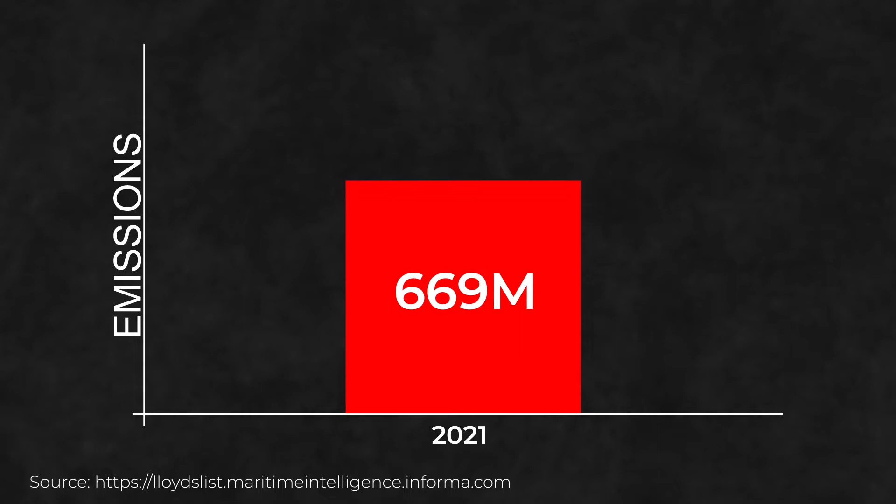According to Lloyd's List, the global shipping industry emitted approximately 669 million tonnes of CO2 in 2021, a 4.9% increase compared to the previous year. Despite commitments from the IMO to reduce emissions, things just don't seem to be going in the right direction, which is strange because technologies do exist that would reduce the amount of fuel that ships burn and their associated emissions.

One of the most promising was actually developed in the 1920s by Anton Flettner, the rotor sail. He fitted 2 huge cylinders to a cargo ship, which would spin around, making use of the Magnus effect to generate thrust. Jump forward 100 years and you can still see a few modern ships using rotor sails to reduce both fuel consumption and greenhouse gas emissions.

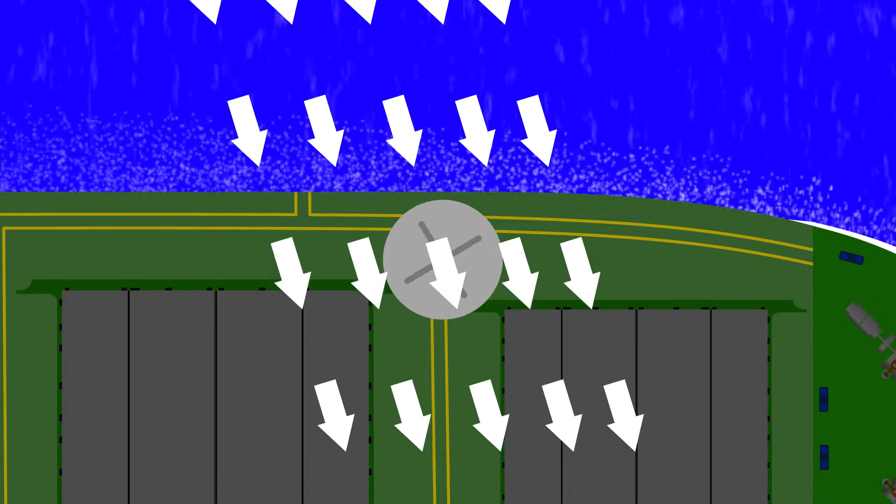Essentially, a cylinder spinning in an airflow will deflect the flow of air, then, thanks to Newton's third law of motion, an equal and opposite force is exerted on the rotor and felt by the vessel as thrust. It basically acts as a sail, taking energy from the wind and using it to help drive the ship forward, reducing the demand on the main engines and emissions.

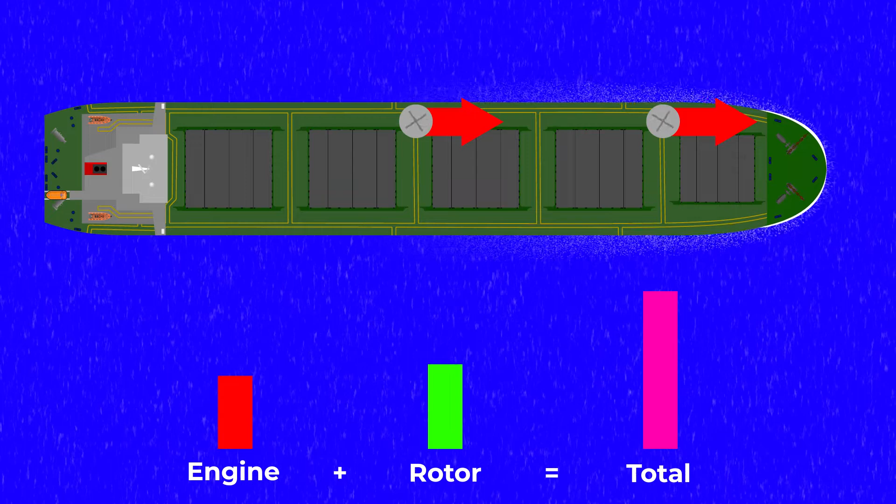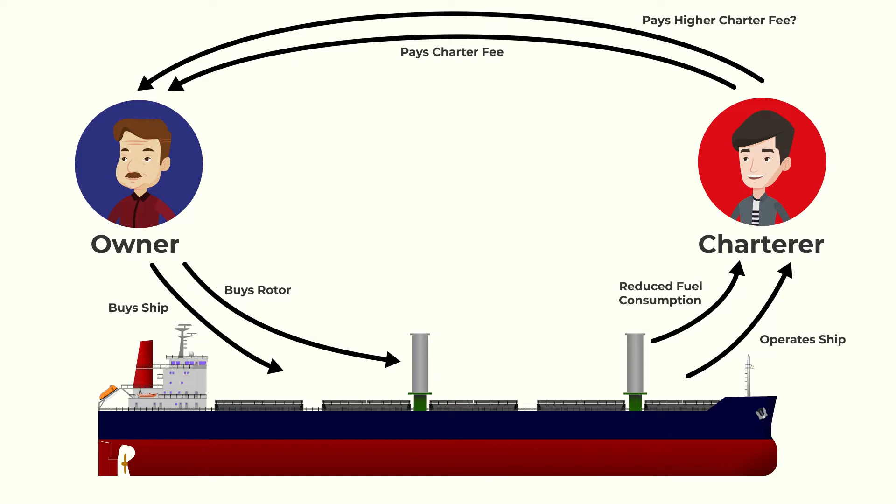Although significant fuel and cost savings are possible, the technology just hasn't caught on due to a peculiarity in how the shipping industry works. You see, ships are owned by an owner but operated by a charterer. A rotor sail would need to be installed and paid for by an owner, yet it would be the charterer who benefits from reduced fuel costs. For the owner to get a return on their investment, they would need to raise their charter rates. The charterer would then have a choice between a cheaper vessel with no rotor or a more expensive vessel with a rotor that might save them enough to justify the higher cost.

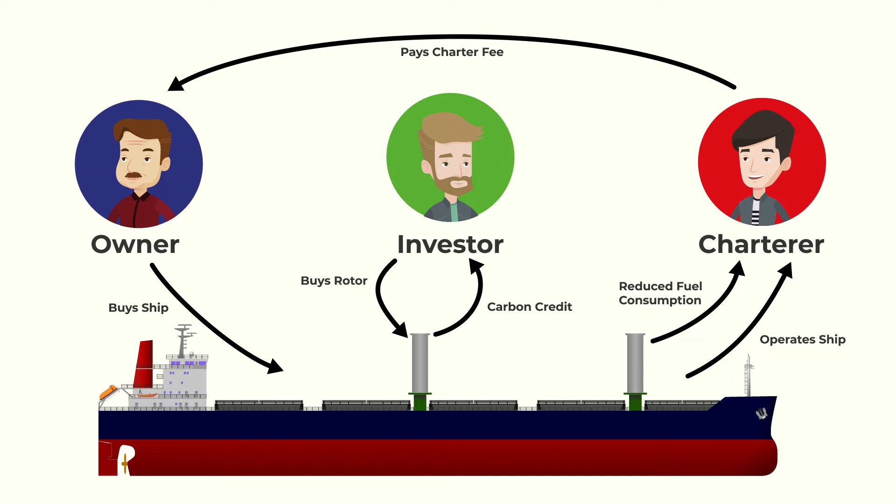But what if there was a third party that could invest instead? Say, someone wanting to reduce a ship's emissions to obtain a stream of verified carbon credits. The ship's owner gets a more attractive vessel, the charterer gets lower running costs, and the investor gets the carbon credit.

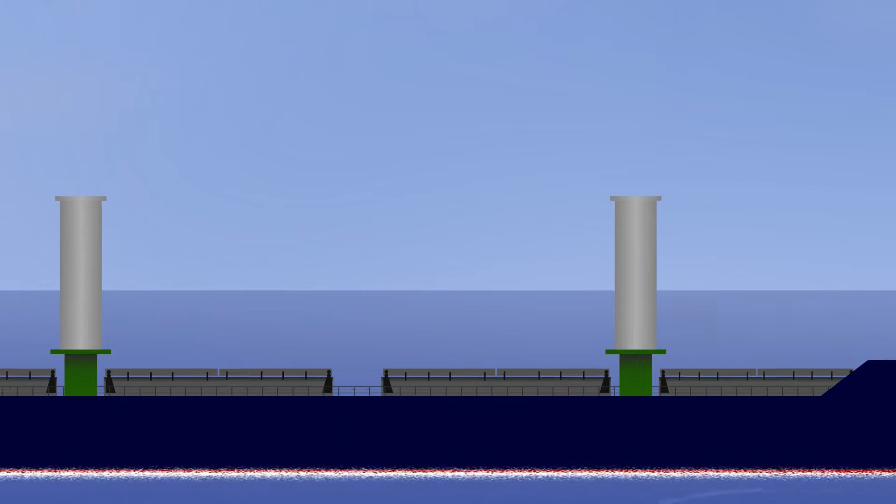The thing is, existing designs of rotors have limitations when it comes to investing. Primarily, they're massive heavy structures permanently attached to a vessel. They're typically over-engineered as they need to be able to cope with potential hurricane-force winds in excess of 150 knots. This makes them quite a gamble because what if you invested and then the ship gets laid up for a year? Your investment would be stuck.

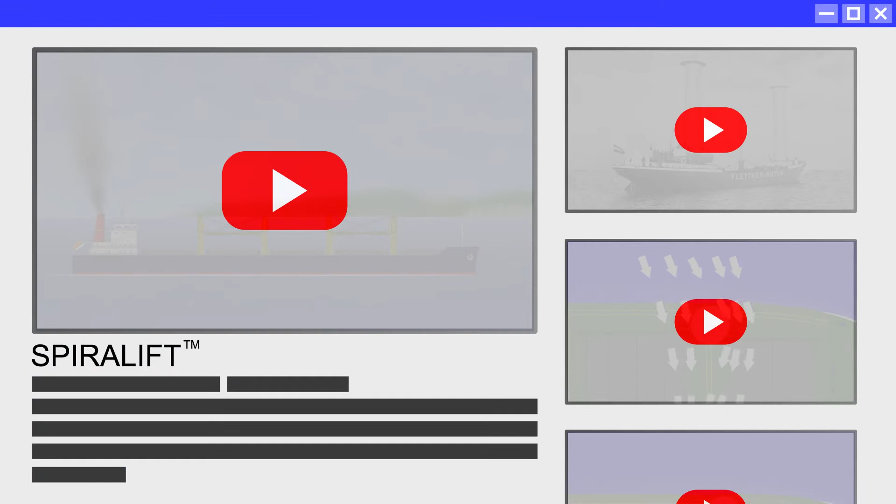So instead, we've developed a new type of rotor specifically designed to suit the carbon investment market. Let me introduce the Reefing Rotor sail. It relies on a technology that's already used in the aerospace, automotive, manufacturing and entertainment industries, the helical band actuator, commonly known as a spiralift. For the curious, multiple YouTube videos do provide greater detail on the inner functions of spiralifts. Traditional uses are for smooth lifting applications where the inherent stability of the metal column allows for precise deployment.

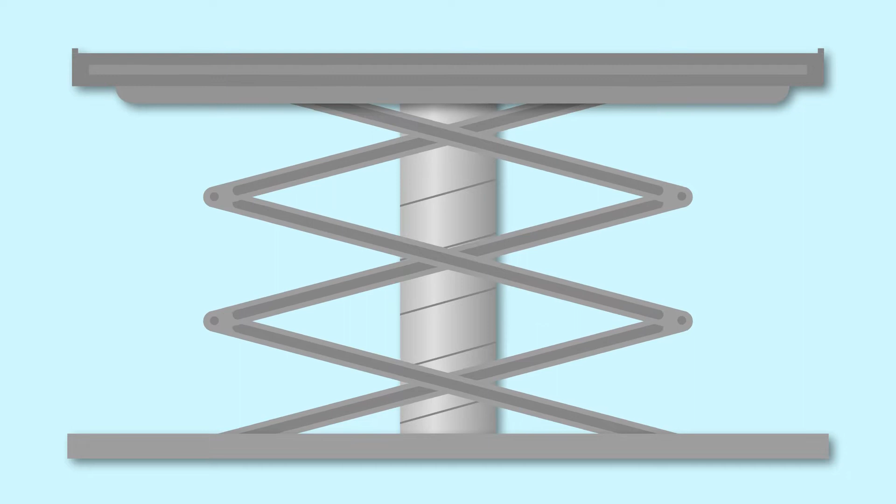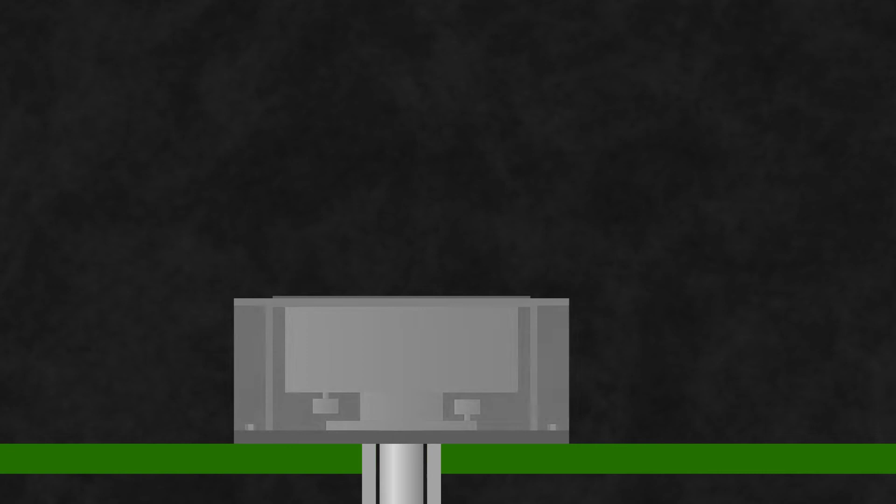In the Reefing Rotor sail, we use that same technology to create a rotor that can be retracted into a deck housing approximately 2 meters high. The rotor itself is self-supporting, but we still have a telescoping carbon fibre mast on the inside to transmit the thrust to the structural members of the vessel. What this means is that the only permanent attachments to the ship are an approximately 20 foot long, roughly 18-inch diameter steel tube, as well as a connection to the ship's power supply.

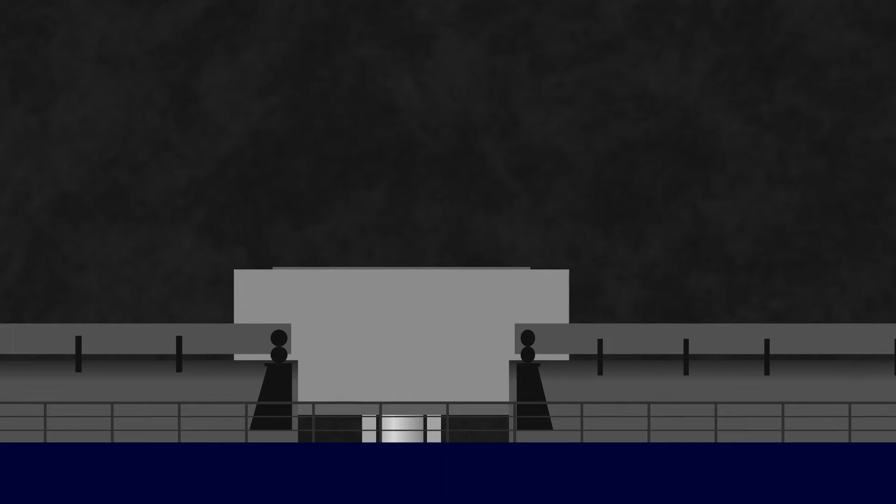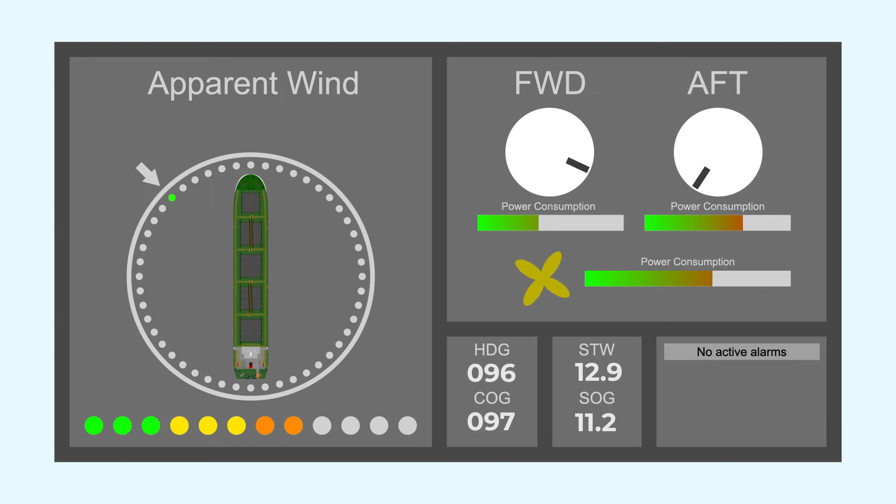Other than that, the entire unit is designed to be lifted off so that it can easily be moved between vessels. To install it on a new ship, you simply bolt the deck housing in place and connect the power supply. The Reefing Rotor sail is controlled from a panel on the bridge which is capable of automatically adjusting the rotation speed to generate the most thrust and even reefing the sail when conditions require. For example, when wind speeds exceed the design parameters of the sail or when the apparent wind direction is right ahead so that it doesn't create additional drag.

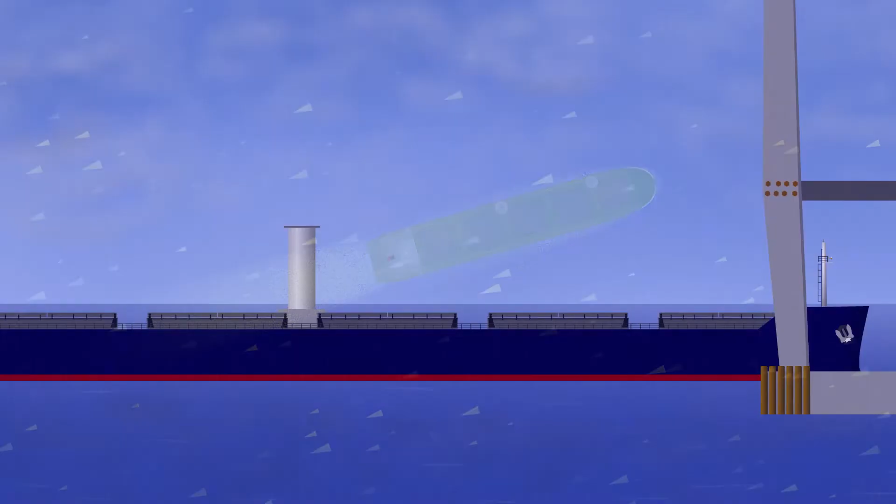You can also retract the sail to pass under low bridges or when in port so that it doesn't interfere with cargo operations. Of course, whenever it's needed, you can unbolt the deck housing and remove the Reefing Rotor sail entirely and just transfer it to another vessel on a flatbed truck. This is particularly useful in situations such as the trading area of the vessel is changing to one with less favourable conditions, or the crew are not operating it in the most effective way, or even if the vessel is going to be laid up.

If, on the other hand, you find a vessel is especially good at operating their sail, you can simply fit more units on the same vessel. It's common for ships with rotors fitted to have multiple units, but the transferability of these Reefing Rotor sails means that you don't need to commit to installing them all on one vessel straight away.

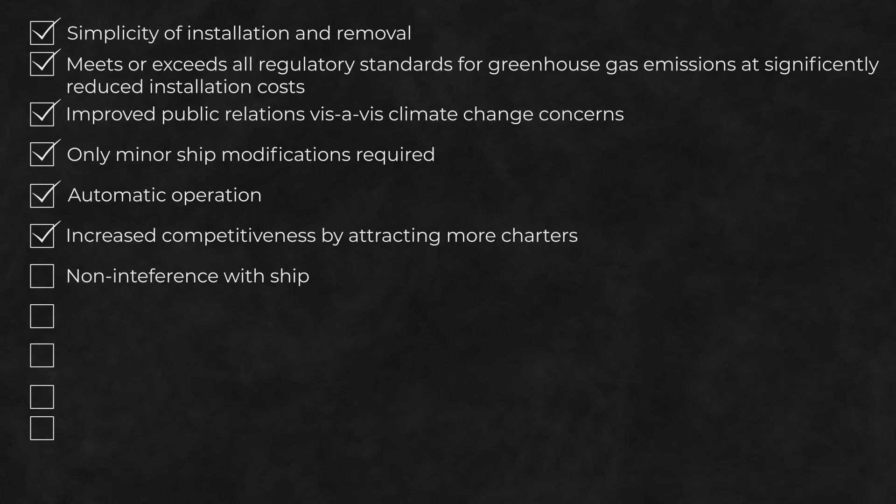The investability of the Reefing Rotor sail means that everyone is happy. For the ship owner, they get a host of benefits at no additional cost. The charterer gets a vessel with significantly reduced running costs at the same charter rate as any other vessel, and the investor gets a stream of verified carbon credits from multiple Reefing Rotor sails on different vessels that can be moved around as required.

The ability of the system to reef the sail means that the ships on which it is fitted can operate in the same way they always have done, when required, yet on passage, when the conditions are favourable, they can deploy a Magnus rotor and use the wind to reduce demand on their engine and reduce their emissions, which then gets credited back to the owner of the sail, you, the investor.